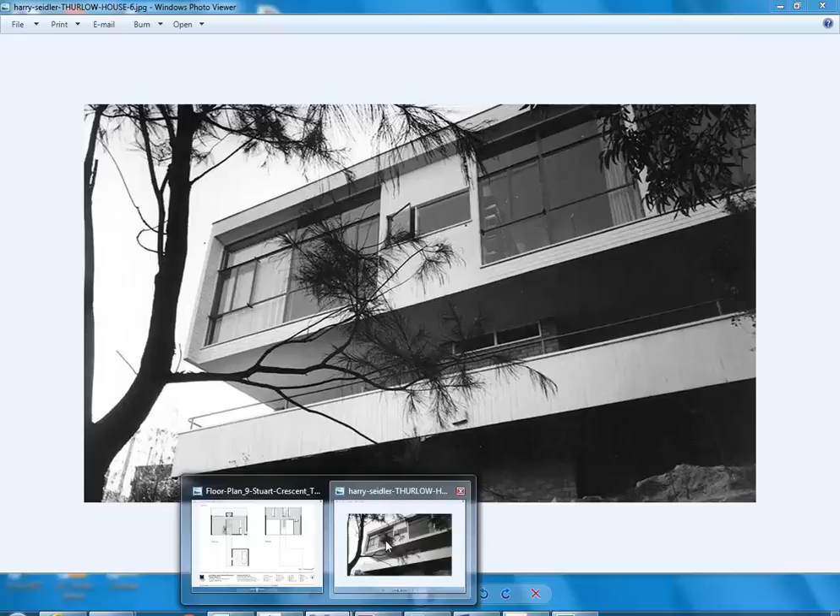Okay, so now that I've got my roof in there, I can start looking at the rest of the facade, and we've got the upper level now, which has these solid walls, but then also these glazed sections, which we can make using curtain walls.

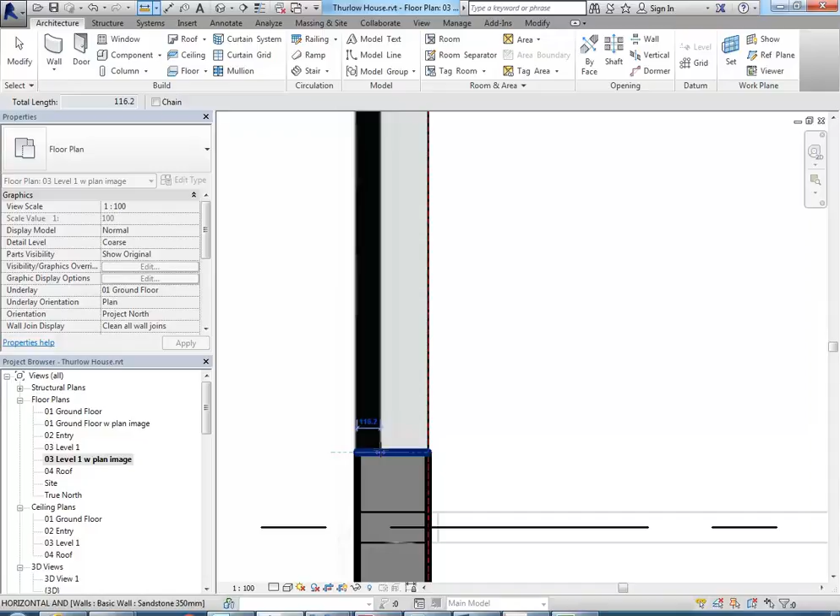So I'll begin with the solids and the solid walls, and so I might just measure off the plan there. They're timber framed walls, I just want to get an idea of the thickness. I'm going to say they're a bit thicker than what's shown there - they're probably 120.

So I'm just going to go to the wall tool in my level 1 drawing and change the wall type to - well, actually, just to save time for now, I'll just use generic 100mm. We'll fix them up later and make them 120.

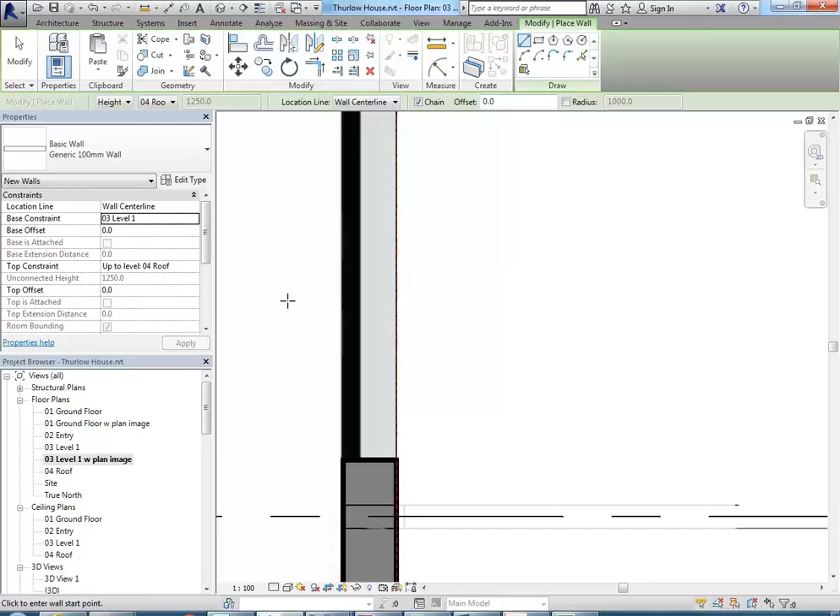So I'm just going to make sure the location line there is on finish face exterior, and then snap to the corner of my existing exterior wall that is below that, and then bring it up, and it's going to have to come past that reference plane that is on the edge of the balcony and project out a little bit.

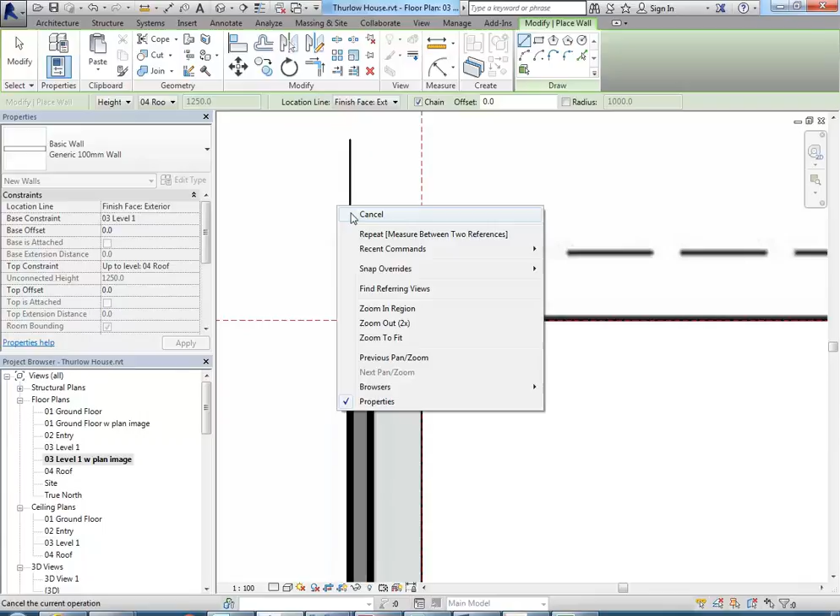So this is going to be an instance where it'll help me a lot if I draw in now a reference plane from the top of that wall all the way across to the other side. So when I draw the next wall, I can line it up.

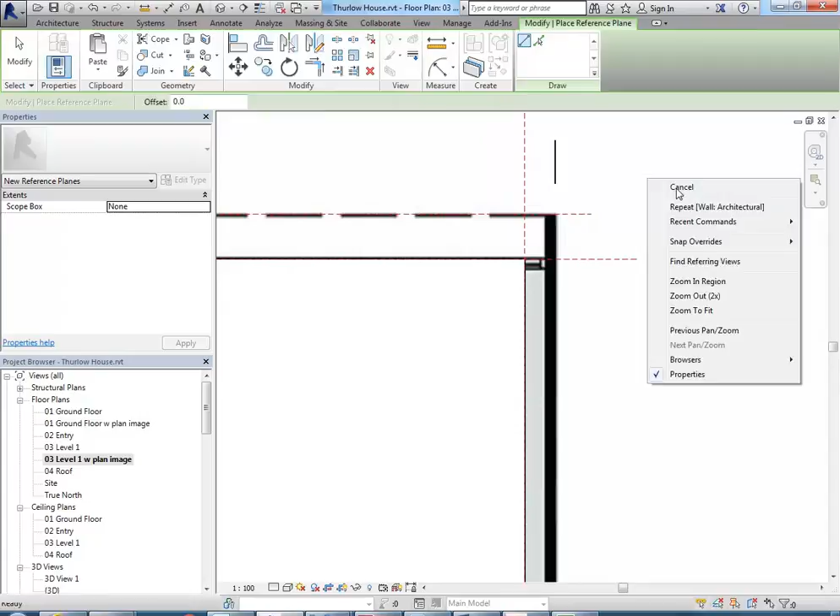Yeah, that's right. So now when I go to draw my next wall, I'll snap to the corner of the wall below in the same way.

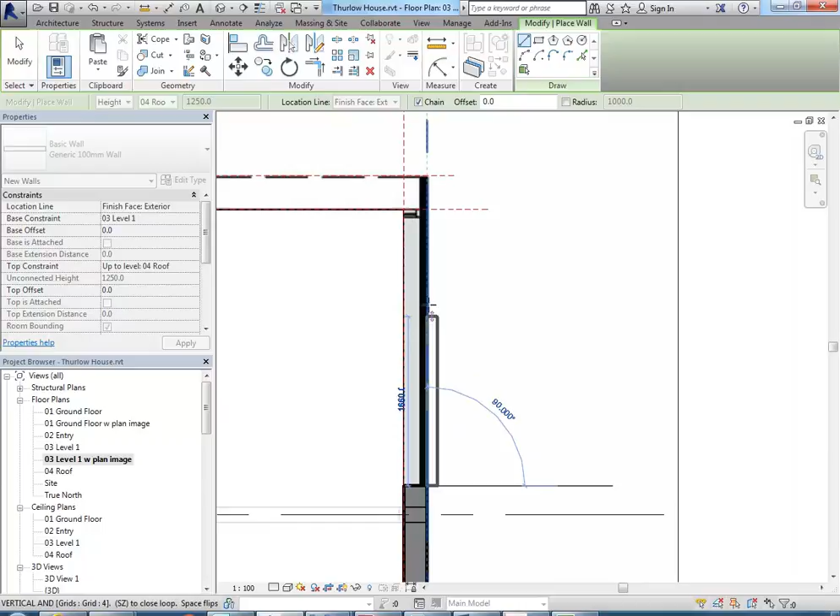And you should see something interesting there. So I'll give you some time to do this, because that wall you can see now is going to the right, and you need to flip it using the space bar so it goes the other way.

So finish face exterior. Okay, so don't be tempted to bring the floor out, because remember these walls do stick out beyond the floor line - another typical Seidler trademark.

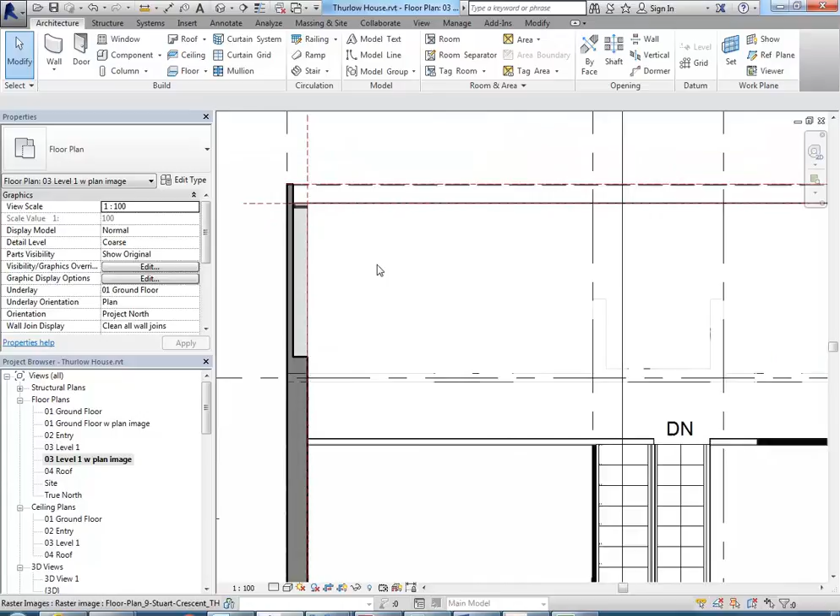Okay, so now I'm going to edit the floor still. I'm just not going to bring that edge out. I'm going to select that floor, go to edit boundary, and then add in the extra lines I need to follow that bit of wall there.

Thanks a lot, Steve. Okay, so just an L-shaped pair of lines, and then with trim to corner, you can join those together. If you want to use pick wall there, you can, but it's probably just as easy to draw line segments in here.

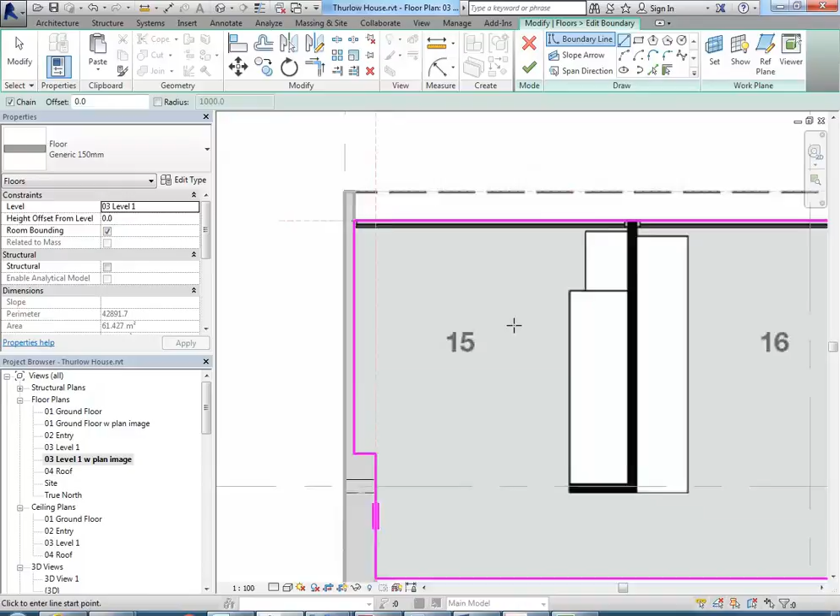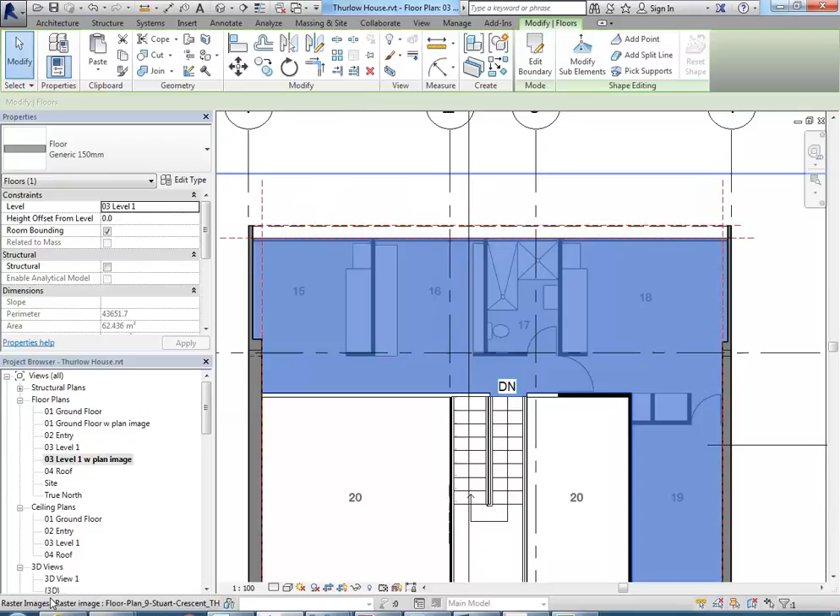Okay, so by doing that, what I've done - you'll see in 3D - is given a base for the next set of walls that are going to continue now from the inside of these walls here.

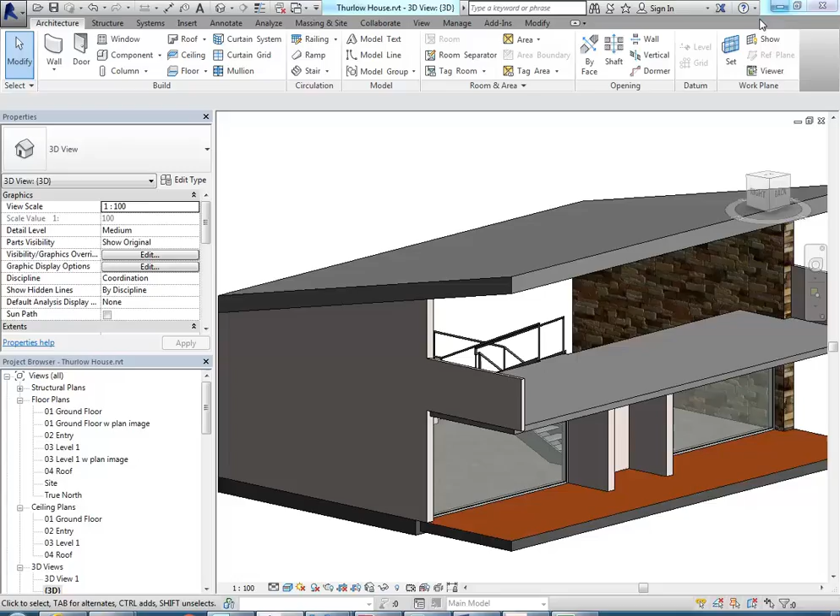So for now, just leave it at 150, and so we'll just bring the walls down that far, and then later on we can bring it down further if we're going to add. We will add more, but we'll do that later.

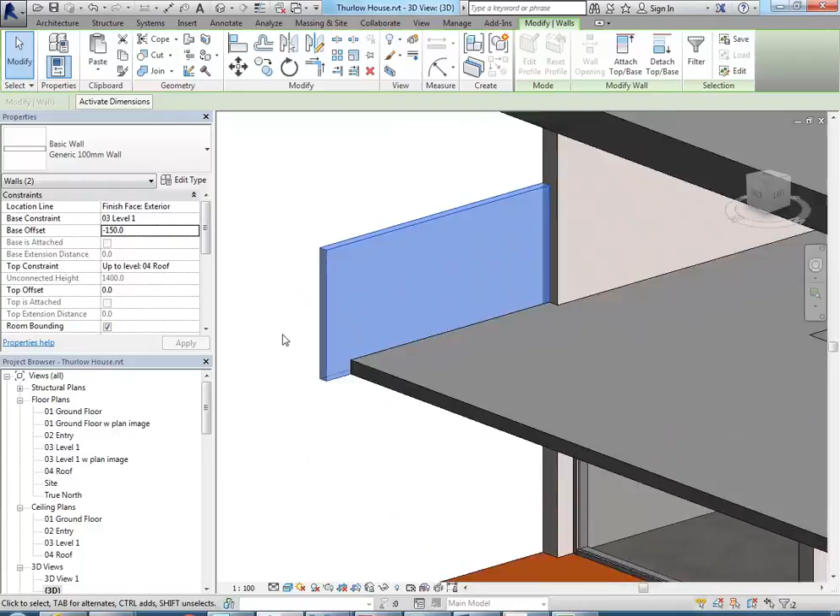So you can just select the two walls, and then to bring them down so that they are flush with the floor, you can put in a bottom offset or base offset of -150. Okay, so notice how now they just extend down that little bit and just makes it look much nicer. Yeah, in the base offset, yeah.

And then just like the other walls, you can go to attach top base and choose the roof.

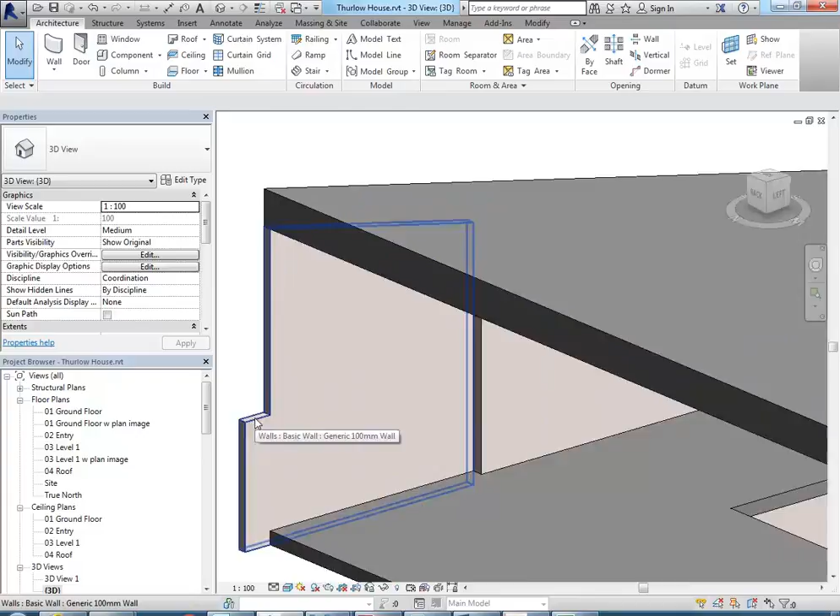Now, if it does what mine's done, which is not extend the entire wall, that's just because the roof isn't big enough. Remember, we did the roof to the line of the floor. So the roof actually needs to come out, and that shows you again, it's just like the way it's been built in real life. The roof does come out further than the floor, so we're just going to fix that.

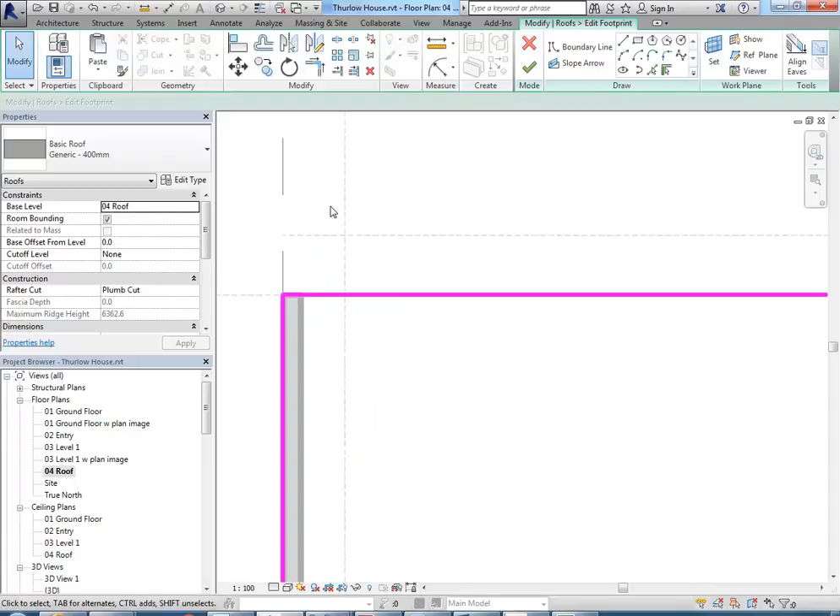So select the roof, easy to fix, edit footprint, back into your floor plan, and we've got the reference plane there to show us where the roof should be. So you can see the purpose again of the reference planes. I'm just going to drag that line onto the reference plane, tick to finish, and now it's right.

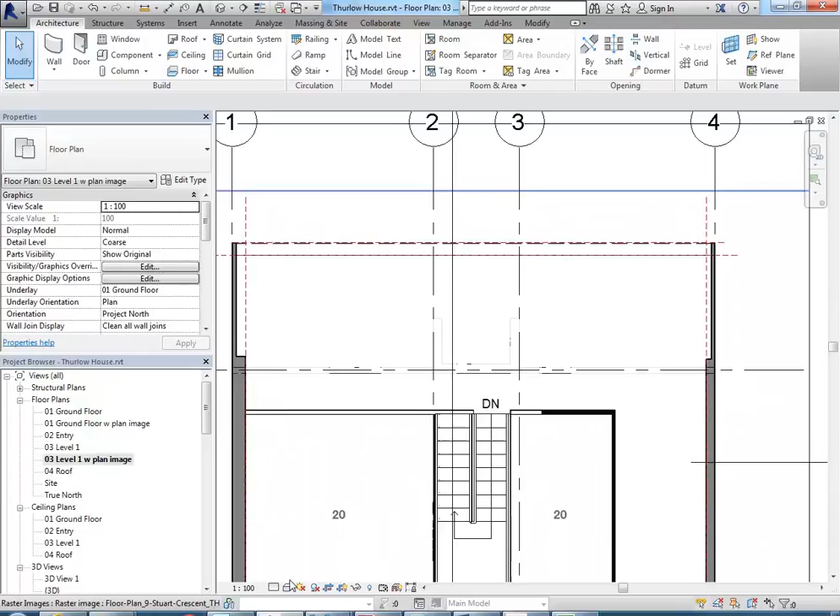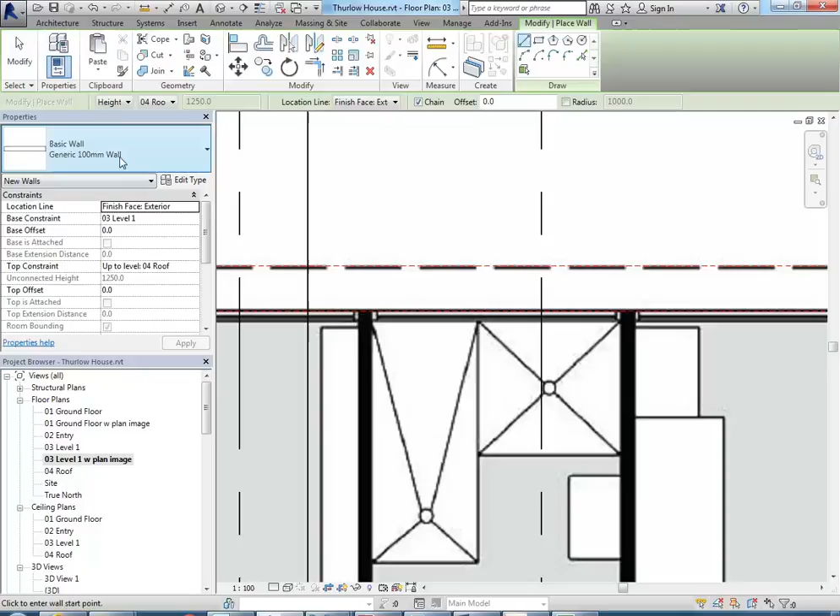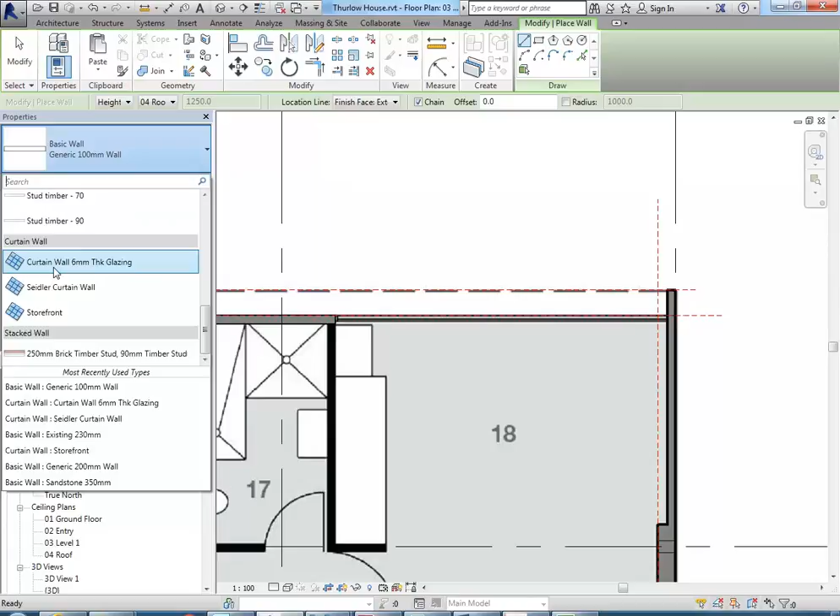So for now I'm just going to draw a wall in with the basic wall, tracing over the reference plane I've got there. Try and get that as accurate as you can, because that'll determine the placement of the next wall, which again I'll just start very briefly with curtain wall, 6mm thick glazing. Going to go from the centre line of the wall I've just drawn across to the right.

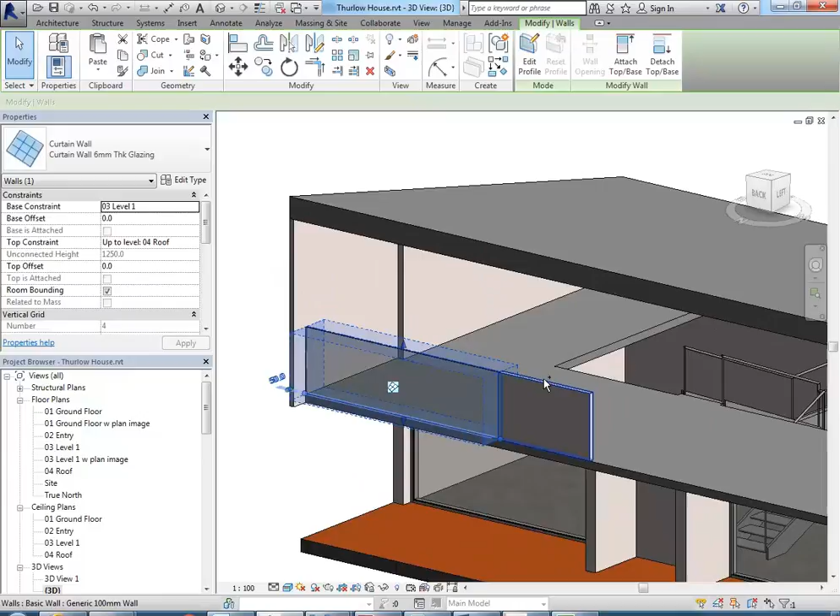And so now in 3D you can see those walls are low height because they're just going to the roof level, but I can easily select them, attach, and choose the roof.

So is that the end of the line? So like with the floor plan where the wall thing is? Yep, so yeah, all the way to there. Okay, so now I'll just get you started with the grids, and that'll be plenty for today.

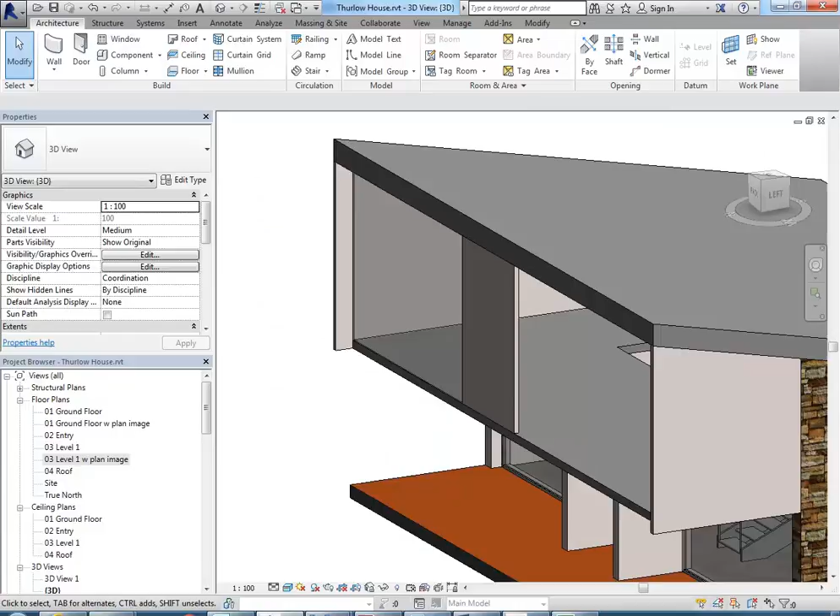It's good we've got a lot done today. So I'm going to use curtain grids just to do a rough setup similar to what's here. We can always fine tune the spacing later.

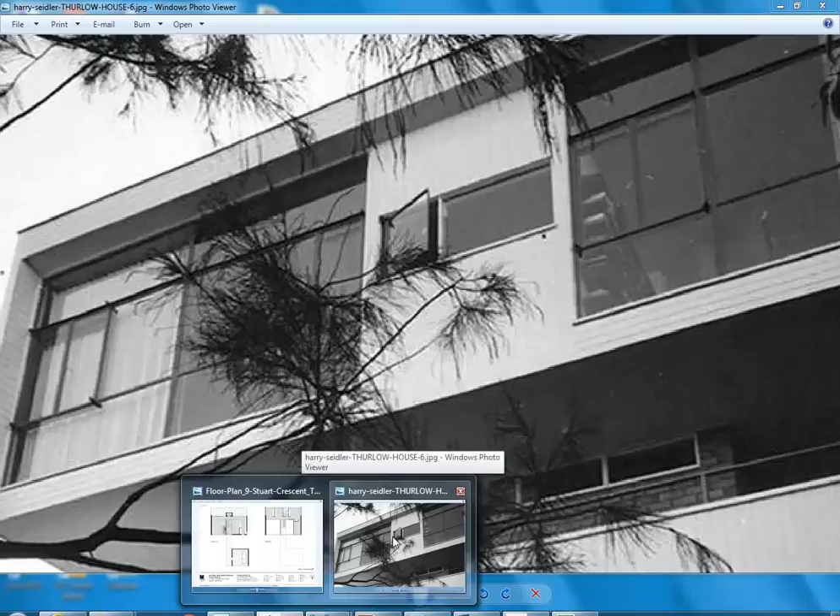Okay, so I'll start again with curtain grid, putting that vertical dividing line in, and then we've got two horizontal ones, 1, 2, not being too precious about the spacing there, and then on the right we've got one that doesn't extend up all the way, so it's over here but it doesn't have the top segment, so I'm going to press escape twice now, then select that grid line, add remove segments, and remove that segment.

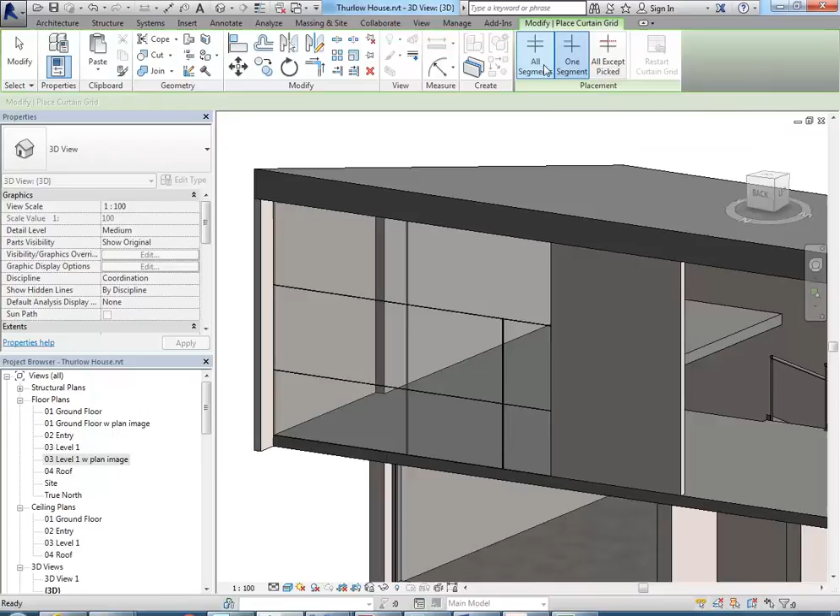And then now we have another grid here, so again back to curtain grid, and this time, so I don't have to come back and delete the segments, I'm going to instead change the option up the top to one segment. So it's been on all segments, I'm going to go to one segment and then choose in between those two grid lines, which is another way of making it. So there we go.

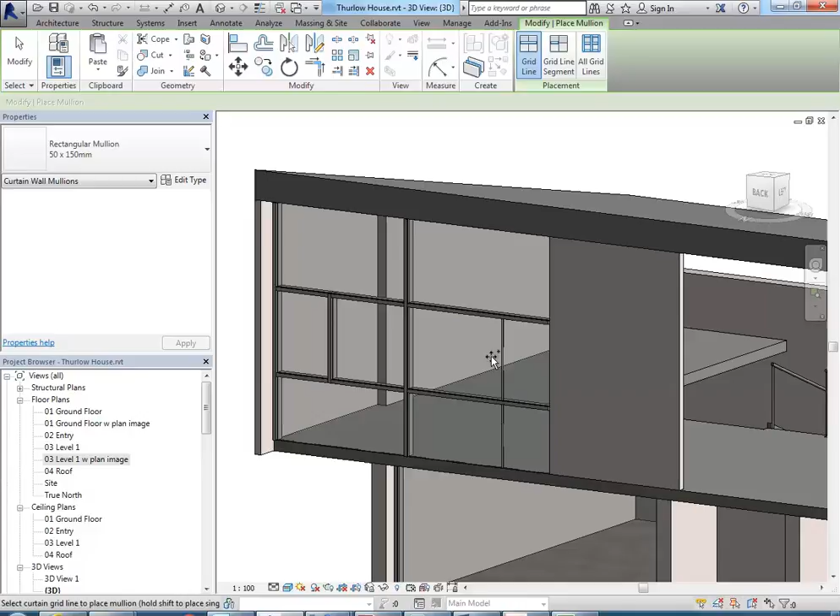I can still adjust the grids after I've put the mullions in, so I'll put some mullions on just to make it look a bit more complete. Just picking each grid line manually. Put those ugly thick mullions in, and I'll show you how you can make them into thinner mullions next week as well.

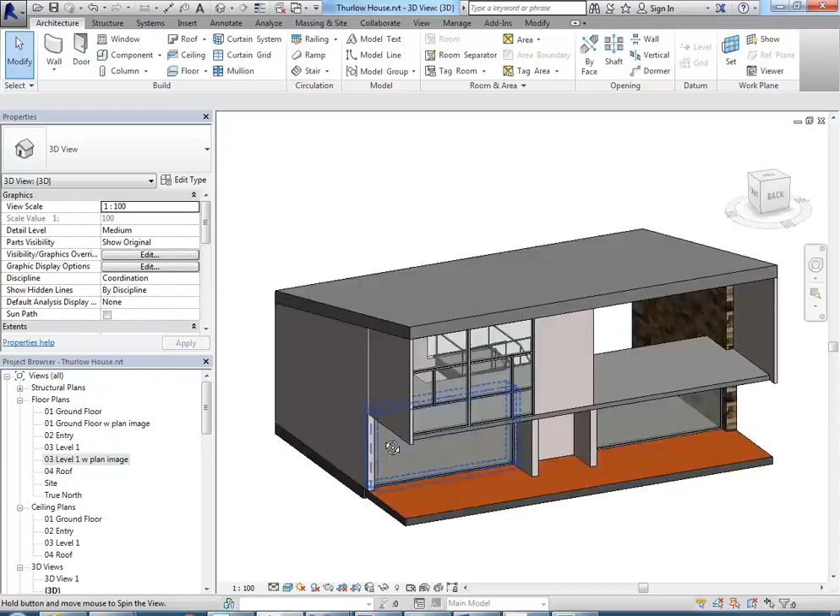But there we are, so you can see it's really starting to look like the building once you get those curtain walls in there, and that's going to be the main finishing element to get that exterior done, and then we can focus totally on the interiors. And we should get well into that next week, so that should be good, but done really well today, so I'll finish there.